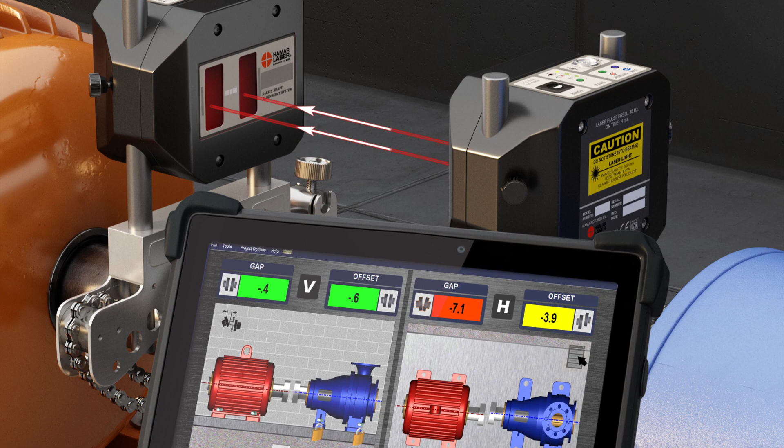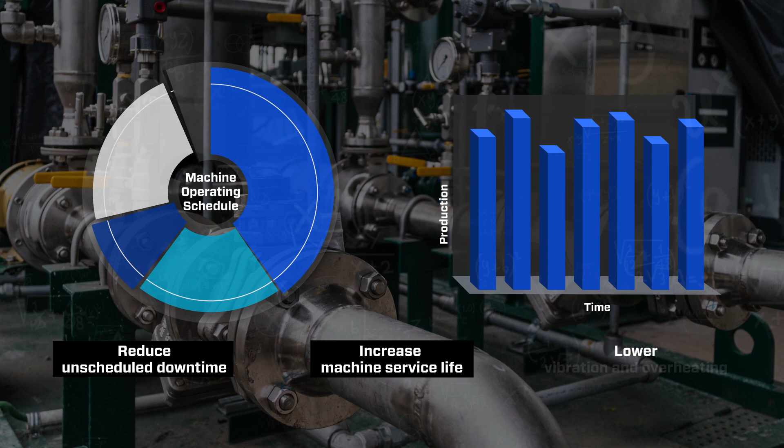There are many products on the market, but none matches the ease of use, versatility, and accuracy of Hamar Laser's X-Series X-880 Laser Shaft Alignment System. Rather than just talk about the benefits of the system, we decided to just show you how incredibly easy and yet powerful the X-880 and Couple 6 software are to set up and use, and let you decide if it's as good as we say.

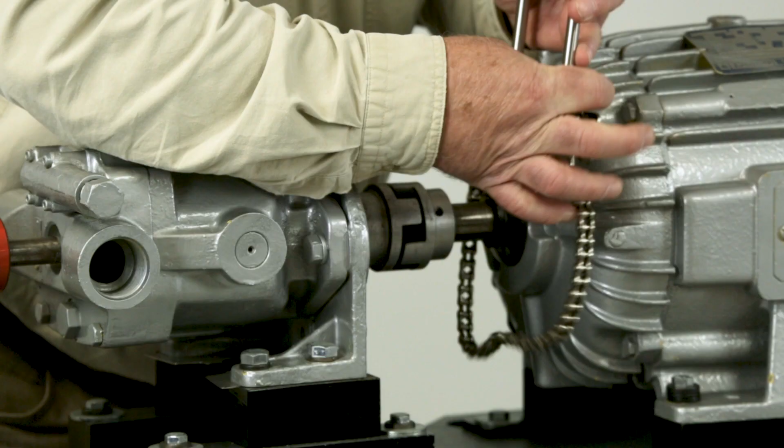So let's get started. First, we need to clamp each bracket to the shaft by wrapping the chain around it, sliding a link on the pin, and tightening the knob. Note the extra chain can be folded up using the magnetic tip, helping to protect the equipment.

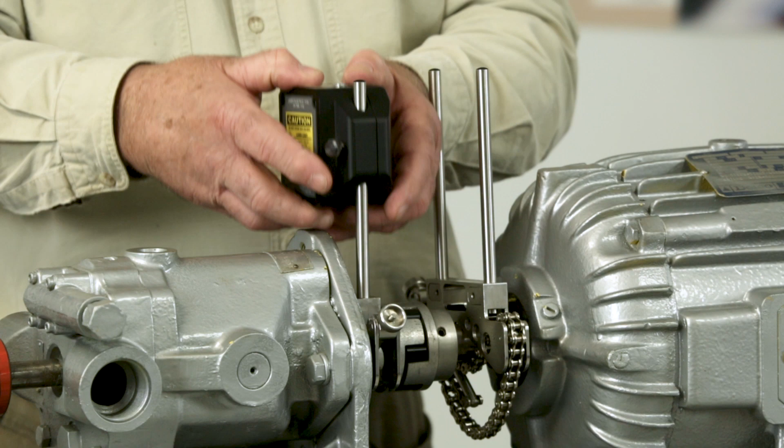Next, slide the laser and target on the posts and tighten the thumb screws to clamp the heads firmly in place, while making sure to adjust it so that the beams from the laser line up with the holes in the dust cap. This pre-aligns the target to the laser and minimizes setup time.

Now remove the dust cap, turn on the target, and boot up the tablet. Next, double-click on the Couple 6 icon on the Windows desktop to run the software.

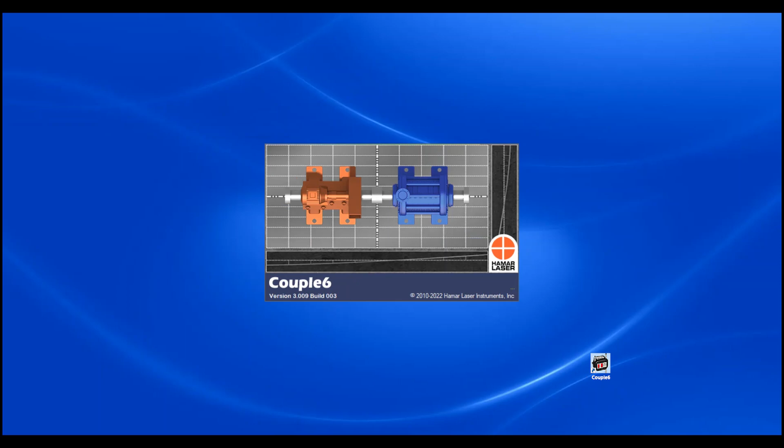In the lower right corner of the opening screen, notice the software automatically scanning the COM ports to locate the X-Series target. Once connected, the main screen opens and we can see the status bar that shows the Bluetooth signal strength, target serial number, remaining target battery life, and ambient light detector.

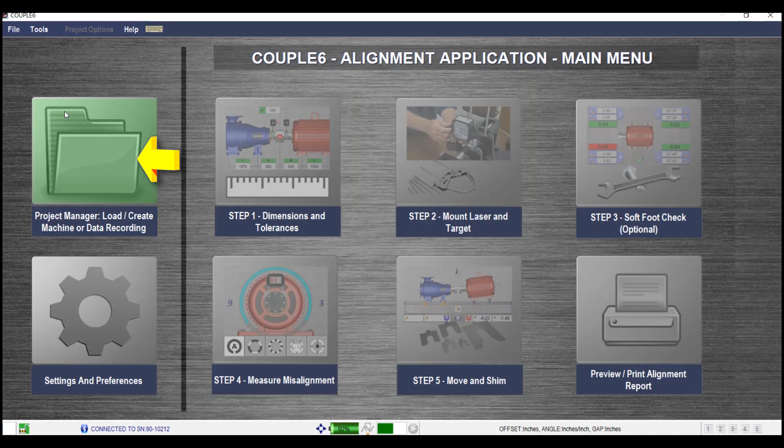To start a new project, click on the Project Manager icon in the main menu. Then click on the Create New Machine icon and enter the machine name. This creates a standard Windows folder for the machine and saves an emailable project file with date and timestamp. This helps organize your machines and keeps track of alignment history.

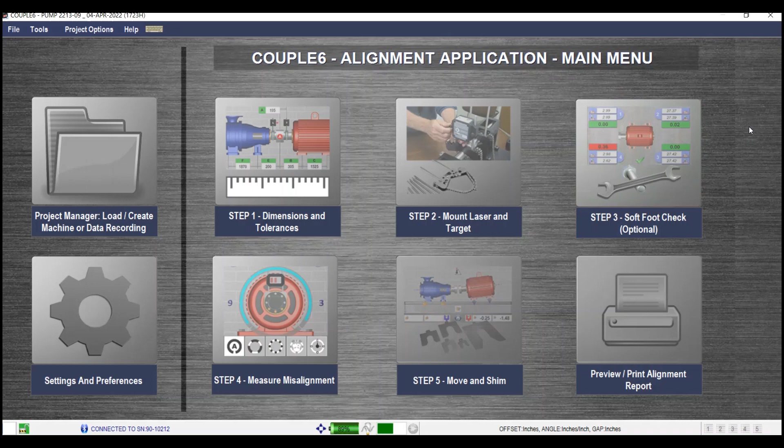Now, from the Couple 6 main menu, click on the Step 1 icon to pull up the dimensions screen. Select the coupling and machine types and begin measuring. To enter each dimension, press and hold the entry box to bring up the keypad. Type in the dimension and hit Enter. Continue to measure and enter all dimensions to an accuracy of 1/4 inch or 6 millimeters.

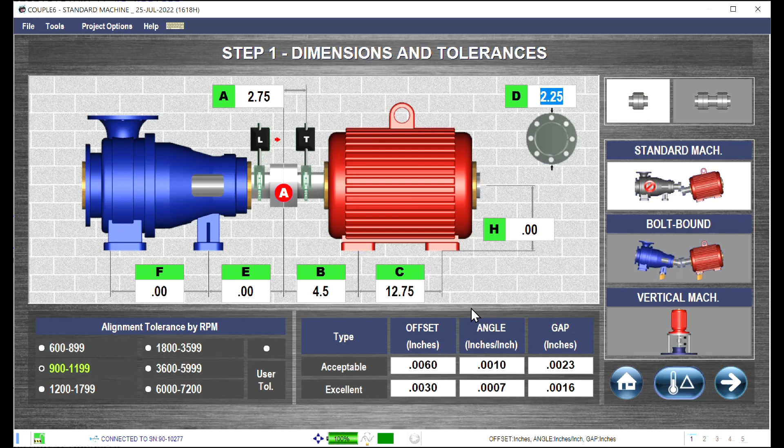Then select the machine's RPM to set the color-coded alignment tolerances, and hit the next button to go to Step 2, Laser Setup. By first having used the dust cap, the laser should already be pre-aligned to the target. If not, Step 2 will guide you through the laser setup to maximize the alignment range of the target.

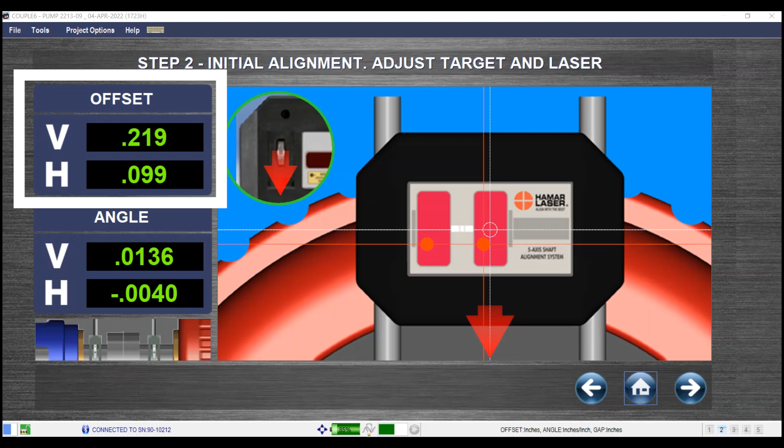For the vertical axis, arrows show you which way to slide the target up and down the posts, with the offset value and screen graphics updating as you adjust the target. For horizontal axis, arrows show you which way to turn the adjustment wheel on the laser.

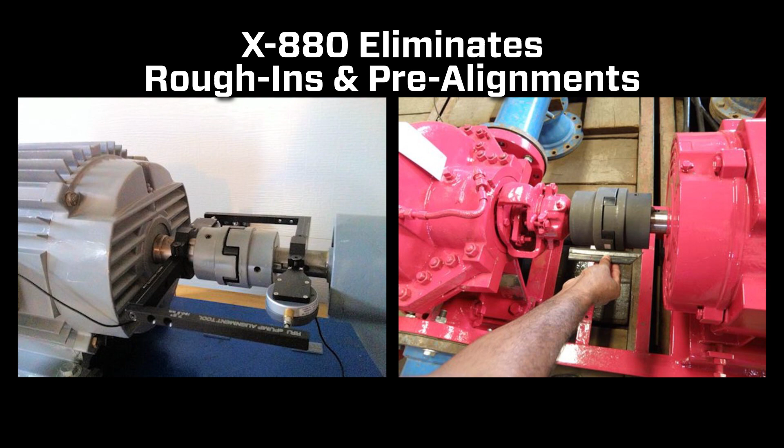Since the laser and target are pre-aligned to the brackets and the target has a 33mm detector, the X-880 eliminates annoying mechanical pre-alignment of the motor, a common problem with our competitors' cheap single-axis lasers. Now let's hit the button and go to Step 3 and check for softfoot.

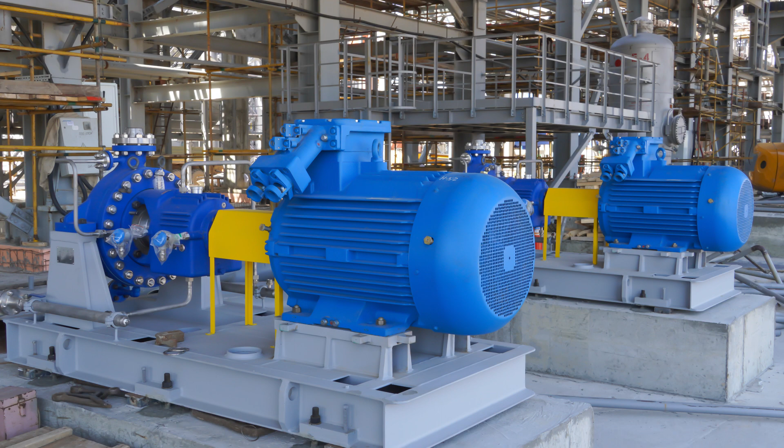One of the most important aspects of good alignment is making sure the motor's feet are sitting flush to its base. Softfoot occurs when this is not the case, which leads to machine frame distortion. When the hold-down bolt is loosened, the foot of the machine should remain in contact with the base. Checking for softfoot and correcting it can save you hours and hours of work.

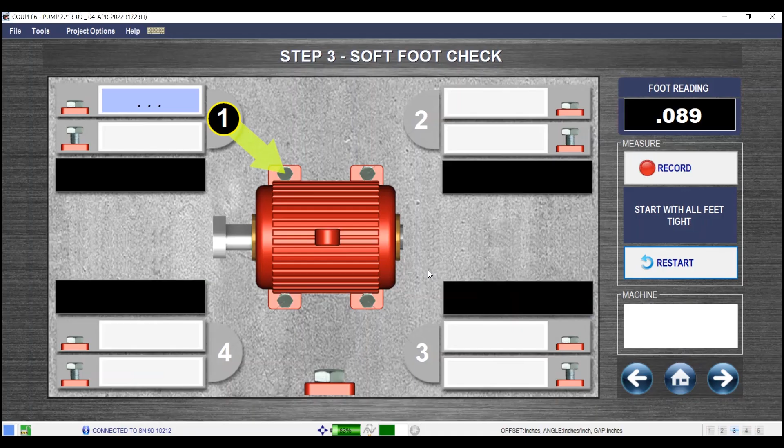You'll notice on the screen there are 4 data-taking areas, each representing 1 foot. To get started, make sure all 4 bolts are tight, then click the Record button, which records the data for foot number 1. Loosen the bolt, click Record again.

If foot movement is within tolerance, then the display will turn green. If not, it will turn red. Notice that Couple 6 reminds you to tighten the foot and also shows foot 2 is ready to take data. Continue the same process for all 4 feet, following the on-screen instructions.

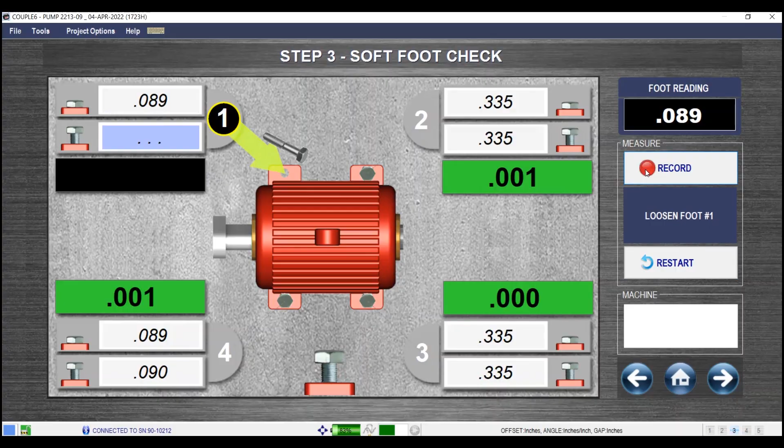Couple 6 will then identify the foot with the biggest change in alignment value, and if out of tolerance, recommend the shim to fix it. All you need to do is add the shim, tighten the bolt, and retake the data to confirm the soft foot has been fixed. Now let's click Next and go to Step 4 to start taking alignment data.

To determine alignment results, it is necessary to rotate the shafts and record data to remove bracket mounting errors.

To handle a variety of different data-taking challenges, the X-880 offers 5 different methods to record data for both coupled and uncoupled shafts. The most powerful and easy-to-use data-taking method is Auto Sweep.

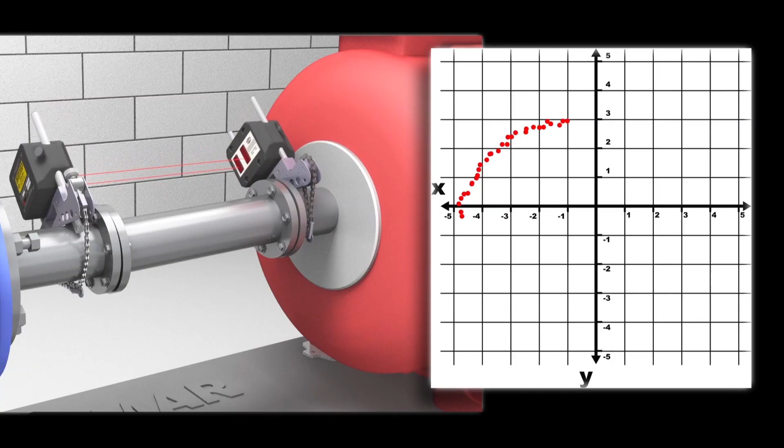It will record up to 16 readings per second, producing hundreds of data points for the most accurate alignment results possible. To use Auto Sweep, click the Auto Sweep icon, then click the Record button.

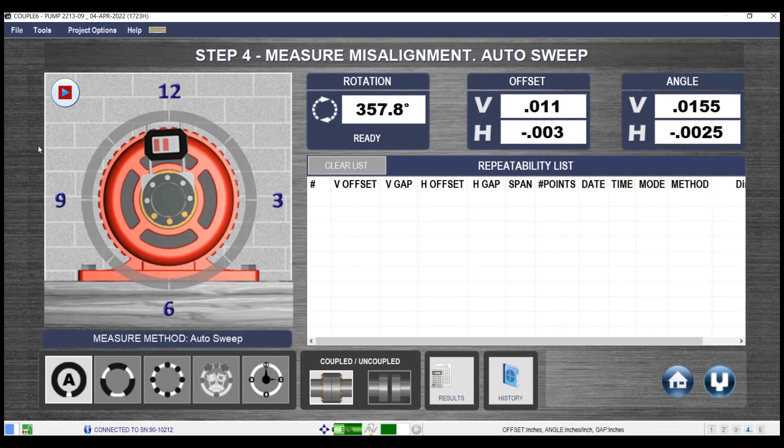As the data is being recorded, the dots appear on the data indicator ring and the color changes to indicate the quality of the data. Red means not enough data, blue means good data, green means the best.

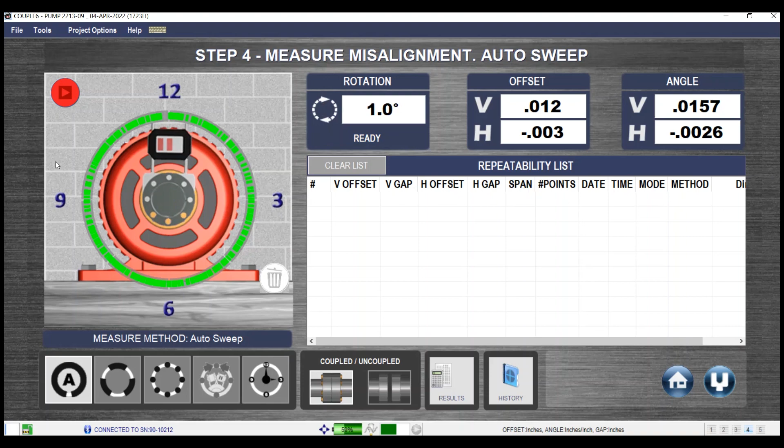When the shaft rotation stops, Couple 6 automatically starts calculating the alignment results. After reviewing the data, click Accept and save the values in the results table.

With Auto Sweep, you don't need predetermined clock locations to take data. You can start or stop anywhere and take sweep data with as little as 60 degrees.

With the results table, you can save up to 20 sets of data to check repeatability, which you can save for historical trending. To review the alignment results, highlight a set of data, click on the Results button, and a window will pop up showing the results with the tolerances applied from Step 1.

Green means the results are excellent, yellow means they're acceptable, red means they're out of tolerance.

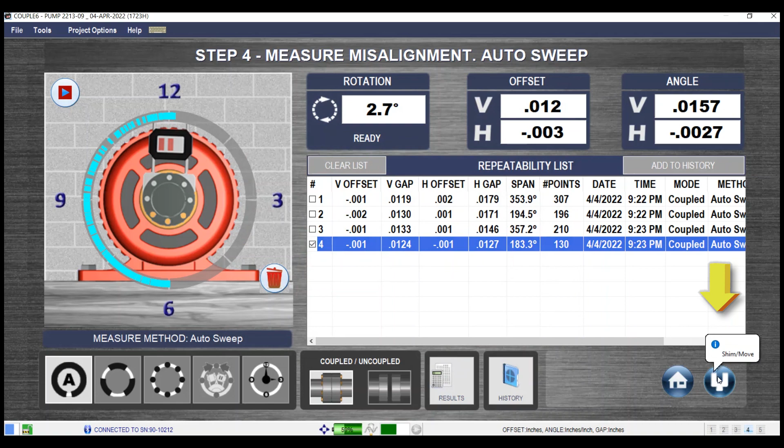To align the motor, close the results pop-up and click on the shim icon, which automatically saves the data, and open Step 5, Live Move Screen.

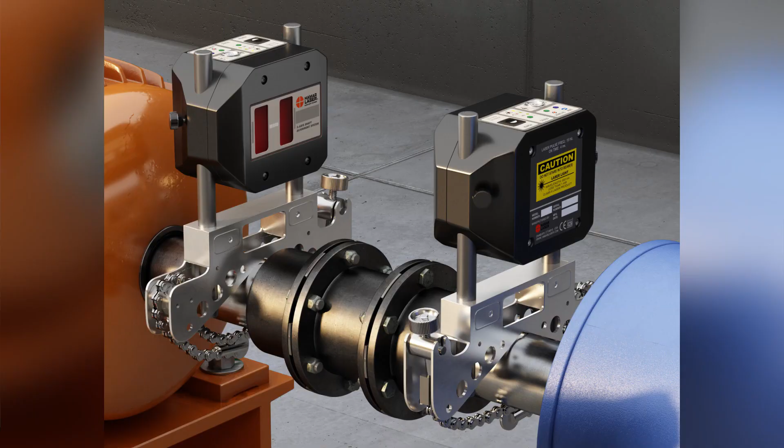One of the major benefits of the X-880 is our dual-plane live move screen that provides 4 simultaneous alignment axes, or 2 alignment planes. This means that you can leave the shafts at 12 o'clock to align both the vertical and horizontal alignment planes without having to rotate to 3 o'clock or 9 o'clock.

This is really important on large machines where tightening the bolts can affect the horizontal alignment.

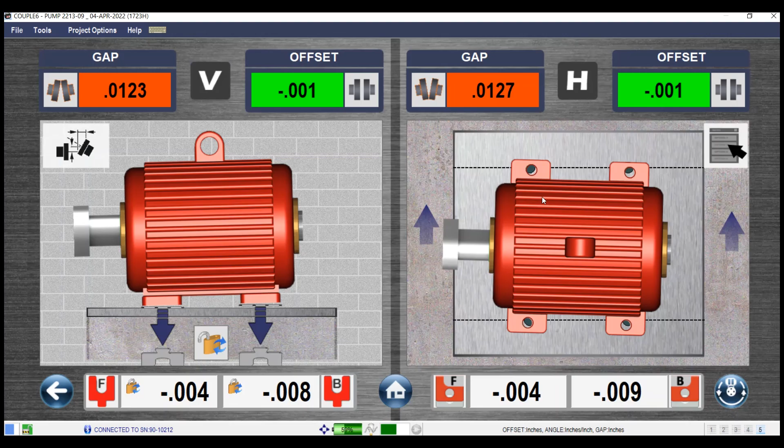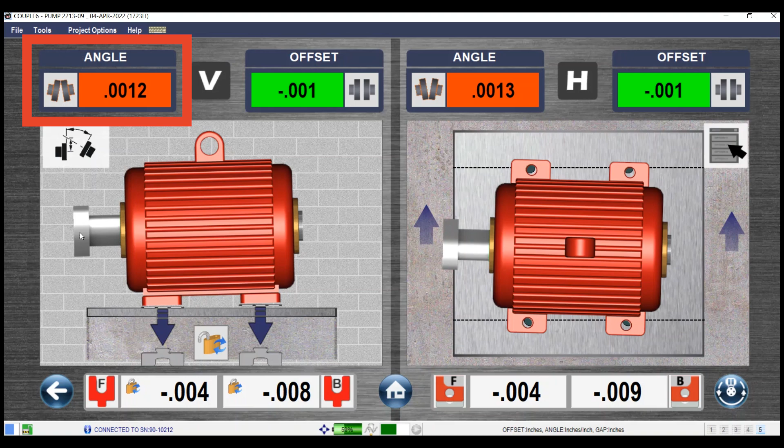In Step 5, there are 2 different ways to view the alignment values: gap offset or angle offset. A simple click on the format icon toggles between the views. Notice the title for the gap display changes from gap to angle when you click the icon.

For those who like to see the alignment at the coupling, Step 5 allows the user to zoom into the coupling by clicking on the view icon to open the view menu and select Coupling Zoom. To zoom out, just re-click the Coupling Zoom icon in the view menu and the dual plane view will reappear.

One of our most useful features in all of Couple 6 is our Flip It feature, which allows you to flip the motor image if you find yourself on the wrong side of the machine. No more using the display box upside down.

At the top of the screen, Step 5 shows the gap and offset values for both the vertical and horizontal alignment planes, all continuously updating with each move of the motor.

At the bottom of the screen, Couple 6 shows the calculated shim and move values, which also update continuously. Couple 6 uses the arrows at the bottom of the screen to show whether to add or subtract shims and which way to move the motor.

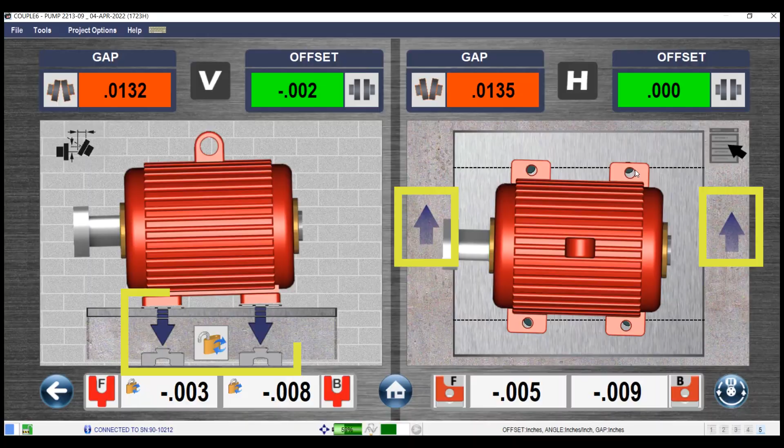To align the motor, first you add the shim. Notice how the vertical gap and offset update as you insert the shim. The motor image also updates to show you which direction you are moving the motor.

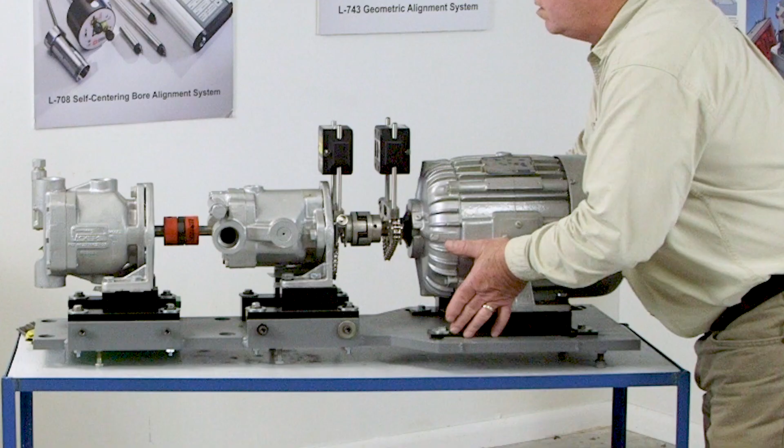After that, adjust the horizontal axis of the machine using normal alignment methods. The amount you need to move the motor is shown as foot values at the bottom of the screen.

Just as with the vertical axis, the horizontal gap and offset values and motor image update as you align the motor. Keep adjusting the motor until the color-coded displays turn either yellow or green.

Notice when the alignment values are green, the bolts are installed on the feet to indicate the alignment is completed.

Now it is important to verify the alignment, so just hit the Remeasure button and COUPLE6 automatically takes you back to Step 4 to retake the data.

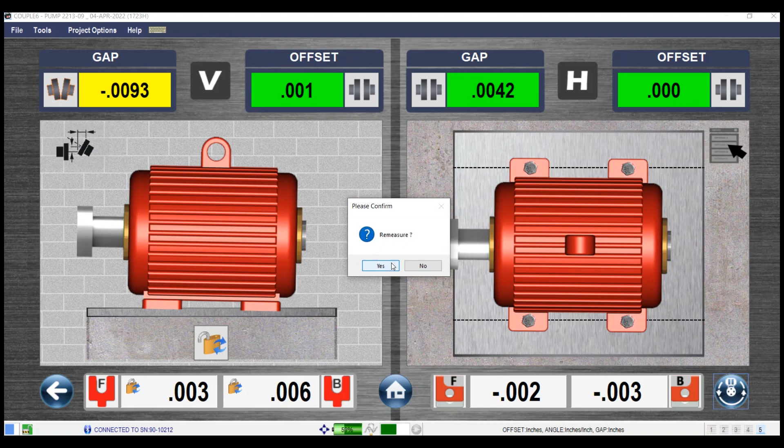When you're done taking the data, click the Results button and verify all the values are in tolerance. If so, we're ready to print the report.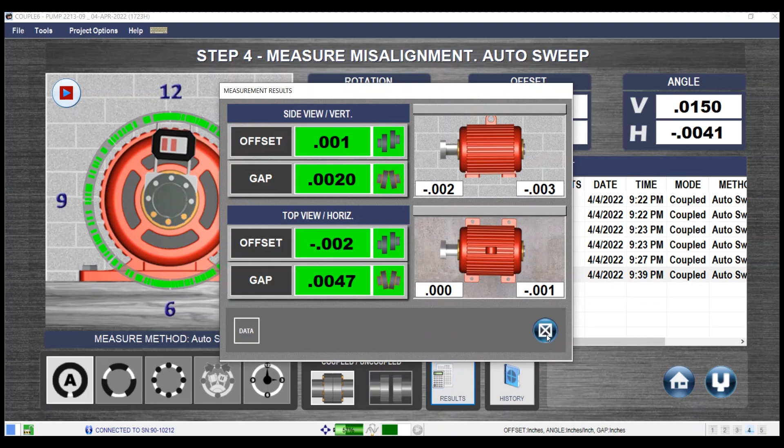The data is automatically saved, so all we need to do is click the Home button to go to the main menu and click the Print icon.

Select the sections of the report to include, and whether to print to paper or PDF for emailing. You can also preview the report before printing.

Once the report is printed, you have completed your COUPLE6 alignment.